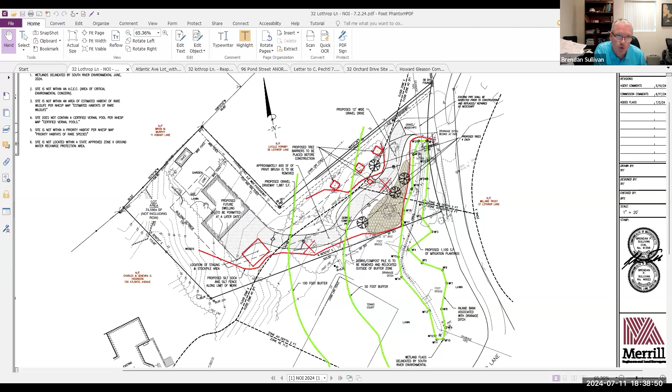The driveway has been relocated to pull it away from the property line a little bit and away from these larger trees, the 26-inch and 14-inch trees that are closer to the property line. So we're going around those trees now. We've added a future dwelling to be permitted at a later date. We were asked to show that to show what the purpose is of the gravel driveway. Let's see, what else was there? I added a note for the drainage pipe to be inspected prior to construction and replaced as necessary in this area under the existing gravel drive wood chip area at the beginning where it comes off of Lothrop Lane.

We came up with an alternative access for the lot off of Atlantic Ave. This access would include the removal of about 5 to 7 trees 12-inch or over. It also goes over some ledge outcrops and some cut and fill areas. So we feel that the better access point for the locus is off of Lothrop Lane. That would also require an easement over the existing lot to get out to that rear buildable portion of what's now 32 Lothrop Lane. I think that's about it at this point. Take your questions and comments. Commissioners?

Can you go over again why you think the easement across the other property, like what was that again? There's ledge there or? Yes, there's a number of ledge outcrops in this area here. There's also, it's all wooded, so it'll be clear cutting. Like I said, it'd be at least 5 to 7 trees of 12 inches or over. I don't know how many more smaller trees there would be.

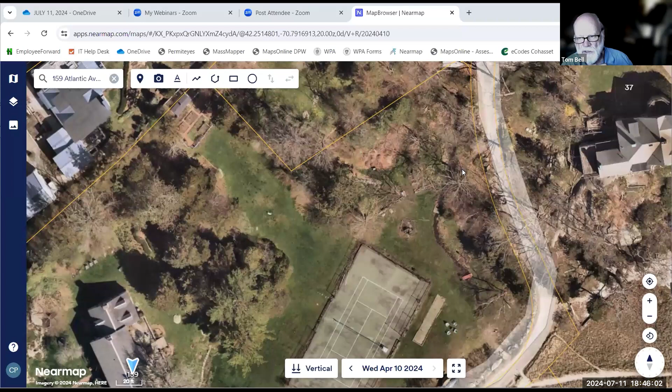Is that tennis court straddling the 2 lots now? No, the tennis court is entirely on the lot for 159. So if you were to mitigate the disturbance in the buffer zones, where could you do it? On our lot? Yeah.

Well, the area that I proposed between the gravel driveway and the ditch, we could do some additional on the other side of the driveway. We might be able to extend the mitigation along the bottom of the driveway. Brendan, if you wanted to pull up your plan again to show the mitigation areas. Sure. You do have a mitigation plan, right? Yes. Okay, let's have a look at that.

Well, it's the same plan, this area in brown here that we're proposing. Right now it's 1,100 square feet, going from the wetland flag line almost to the edge of the gravel driveway. We could certainly extend that up to the north in this area, and also maybe extend it down into this area here. I'd like to try and keep it on the same lot as 32 Lothrop. We could do some mitigation possibly amongst these trees over here.

Like I said, it's this overgrown privet hedge that's there, which is non-native. I don't know if you're going to call it invasive, but if you want to extend the mitigation to like 2,000 square feet or something like that, we could certainly do that. What's the area of the driveway that's in the 50 and the 100-foot buffer? Let's see.

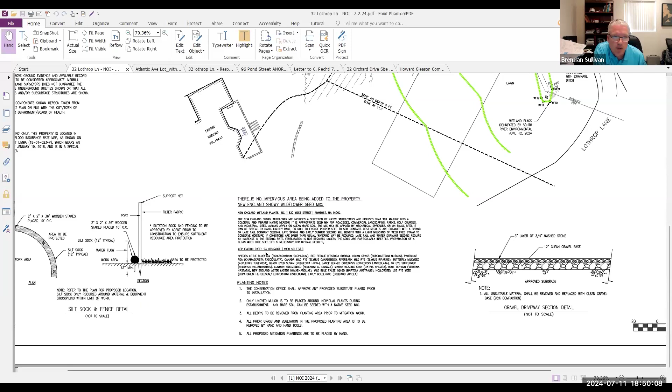Okay, so your current mitigation plan is, did you say 1,100 square feet, Brendan? Yes, we have 1,100 square feet in this area here. Okay. So, I guess I would like to see, well, before I even say that, what is this mitigation gonna consist of? What's your plan here? You have a planting plan? We're just showing the typical wildflower seed mix. Nothing in particular. And we are showing 4 proposed trees. I don't have a species for those yet, but I'm sure we could come up with that. It would probably be something we could take off your preferred tree list, if you wish.

It sounds a little bit vague to me. Frequently when we see a mitigation or restoration, it's a little more detailed than you've got here. The effort to put it on the lot is appreciated, but I agree with the sentiment that if we're giving up whatever square footage it is in the 50, we'd like to try to match that, and not just a generalized seed mix that could be mowed over at any time. Some more robust planning would definitely make that an easier pill to swallow, in my opinion.

And thinking about our mission, which I think is to conserve wetland, it's a struggle. We're not a tree conservancy or a ledge conservancy. From a mission standpoint, I'm struggling with why not just go over a non-buffer area, if there is an alternative route. I appreciate the considerations for ledge and trees, but it seems like a trade-off for existing wetland. Why would we make that trade-off? Well, we're talking about the buffer, not the resource itself exactly here. But that's a good point. You can avoid all of this by executing your alternative.

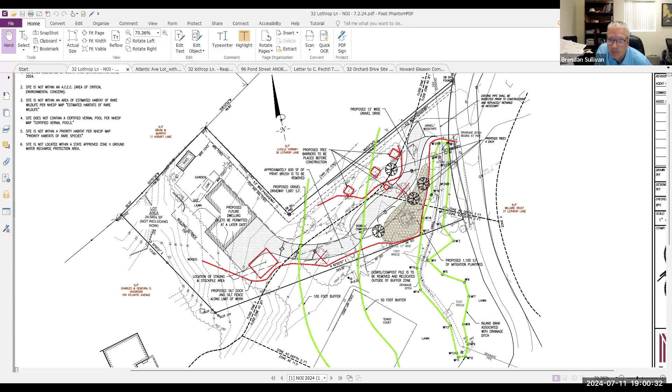Like I said, we can certainly put another planting plan together and propose, I think it sounds like your recommendation is a 2-to-1 from disturbance in the 0 to 50 and a 1-to-1 in the 50 to 100, as well as the trees that we're proposing. Yeah, let's have a look at what you guys can come up with. Again, we're not looking for any kind of curated design. We're looking for random, as natural as possible. Yep. Literally try to restore what the woods were like there.

Mr. Chair, we do have some comments from the audience. Do you want to wrap up what we are looking for here and then address the comments? And I will note, I'm sorry, it's been over 15 minutes, but I figured we'd talk it out a little bit.

Yeah. So just to make sure that you're clear with what we're requesting. We would like to see a formalized plan. We'd like to see a plant list. We want to know where things are going. It would be helpful if you left a lot of this stuff that is irrelevant off of your drawing next time, just really to be clear about what this is going to look like.

And don't stop thinking about the alternative. Come back to us and tell us how much actual excavation, how much cut and fill would be required for your alternative, and how many trees and what types of trees you're going to remove. So right now, you have a relatively detailed plan here. Your alternative is somewhat simpler. I think just a bit more information for that alternative would help us. Okay, we can certainly put that together.

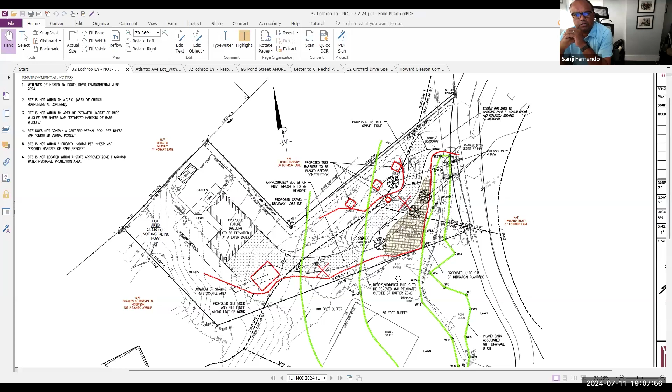Do we need to hear from the abutters? Yes, you do. Yeah, I was gonna say before, can I just go through the comments? I think it might be easier to just promote Ms. Hornby to speak, since she just said we'd like to comment on 159 Atlantic Ave Higginson driveway application. Thank you. Sure. Hi, Lucy. You're muted. Hi, can you hear me now? Yes. Hi, thanks very much for taking our comment.

I'm representing 36 Lothrop Lane. First of all, I'd like to say that we do appreciate both the Higginsons and your commission taking our concerns into advisement. Just as a memory tweak, our biggest concern is that the 36 Lothrop Lane property, which is quite low, drains through that pipe. We're quite concerned that as the new driveway goes in, we heard what Mr. Sullivan said two meetings ago, that the new owners might not necessarily stick with the plan that he has drawn up. So we'd very much like the commission to include in the permit that the continued functioning of that pipe be a requirement of the driveway being put there.

So whether that means assessing it now, maintaining it in the future, the Higginsons have done that over the years, but they'll no longer be in charge of it. So we'd very much like that to be reflected not only in the plan, but also in your permitting process. Second thing, just now you were mentioning closing up that ditch. From our experience, the water flow is extremely variable coming out of the property. It depends very much on whether there's a storm or not.

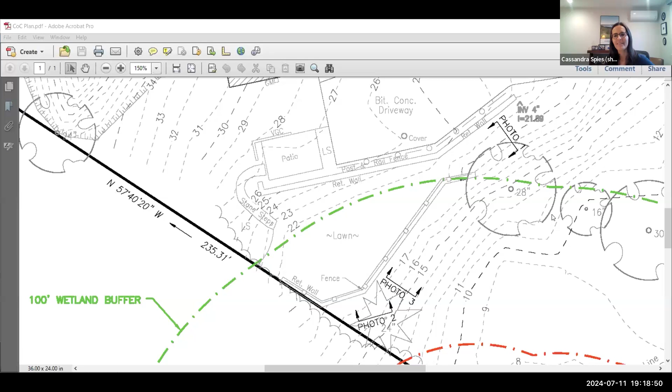Sorry, this is the retaining wall here. It was supposed to come up a little bit like this, and they just left it here. But like I said, the only conditions relative to this would just be our standard number 40, no herbicides, pesticides, insecticides, fertilizers in the buffer zones. And Cassandra, I don't know if you had anything else to add, but that's pretty much it. Thank you so much, Charlotte. So, commissioners, do you have any questions about this?

Doesn't seem so. In that case, I move that we issue a certificate of compliance for, where'd my script go? NOI 2217, 22 Atlantic Avenue. Do I have a second? Did we want condition 40 with it too? The no herbicides, et cetera one? Yes, of course. Okay. Isn't that standard? Isn't that part of our, okay, we just have to call out which conditions we want. Sure. And it's a reminder to the applicant as well that there are conditions, that being one of them.

Thank you. Okay, so do I have a second? Second. Okay, Kathy Berrigan, aye. Sanjay Fernando, aye. Chris McIntyre, aye. Tom Bell, it's aye. That motion passes 4-0-0. Right. Thank you, Cassandra. I'll work on getting that to you next week. Great. Thank you very much.

Appreciate it. Thank you. Charlotte, no, you haven't heard from Valerio? I don't, I hope he's okay, but I haven't heard from him since Wednesday. Yeah. Huh.

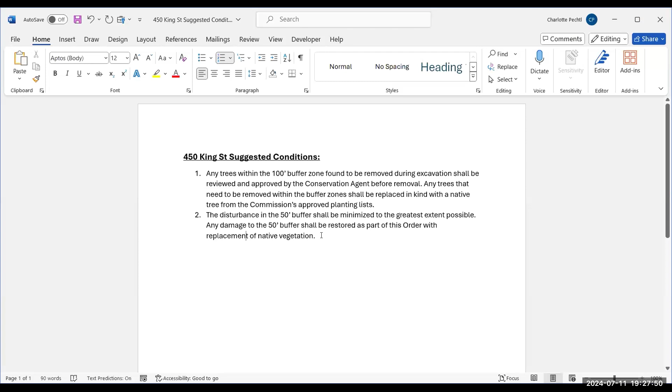So in reality, there really shouldn't be much disturbance at all from just running the trench line, putting the pipe in, and then filling that dirt back in, letting it go back to grass. Yeah, okay. It's all lawn area there too, so it's not like we're removing anything crazy. Oh, okay. And you can just take that out, Charlotte.

Okay, do I have a second? Sure. Sorry, you want to issue an order of conditions with this condition, is that correct? Yes, that's correct. Kathy, I think you seconded. Yes, Berrigan seconds. So the next move is to vote. Kathy Berrigan, aye. Sanjay Fernando, aye. Chris McIntyre, aye. Tom Bell, aye. Motion passes 4-0.

Thank you. Oh, and then you need a variance too. Yes, right. So I move to issue a variance for work within the 50-foot wetland buffer. You need a second. Second, Berrigan. Okay, we're gonna vote. Kathy Berrigan, aye. Sanjay Fernando, aye. Chris McIntyre, aye. Tom Bell, aye. That motion passes 4-0.

Okay. Thank you, Colin. Have a good night. Thanks. So the public hearing for NOI 24-21 is now closed. Okay, next. So 96 Pond Street looks like next.

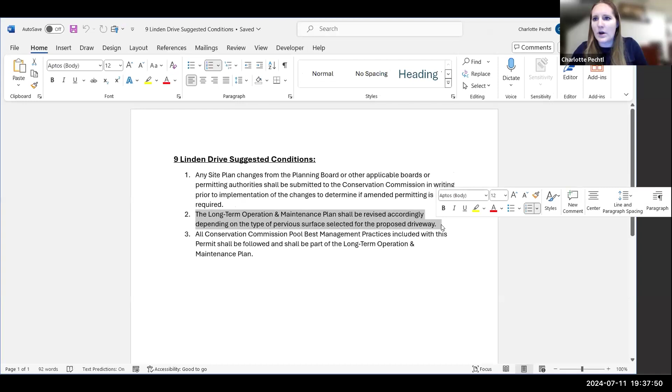And then, since I don't think we're 100% sure on the type of pervious surface for the driveway, the long-term O&M plan shall be revised accordingly depending on the type of pervious surface selected for the proposed driveway. And that the Conservation Commission pool best management practices included with the permit shall be followed and shall be a part of the long-term O&M plan as well. We do have a handout for that, which I'll include in the permit. Sorry, Sanjay, I don't know if you want to reread your motion, but if that sounds good to everybody, or if you want me to modify this, just let me know.

I have a question about the pool filtration. What type of filter are you going to use here? I don't believe it's been determined yet. I know you have a number of standard pool conditions that it would have to comply with, but I don't think we're that far along in the design. Just as long as it's not a sand filter that has to be back flushed regularly. It's probably fine, because of course we don't allow water from the pools to be drained onto the street, and there's certainly no room on this property to drain it properly. Sorry, what was the technical term for that? A sand filter? Yeah.

Okay. Does that sound amenable and appropriate to the applicant as well and to the commission? I think it should be. We've had a couple other projects which were not sand filters, so it sounds like what you're asking for is standard. I'm not an expert in pool filter design, but I think it should be fine. Okay. They would just require a lot more maintenance than more recent filtration systems, but I just want to be sure we don't have an issue of backwashing a filter every 2 or 3 weeks.

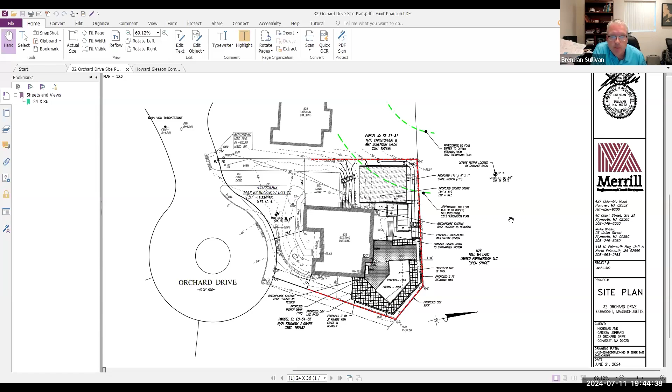It looks like you're going to do some changes to the grade. Yes. I'm going to zoom in on that sports court. So we have the sports court at about elevation 59.5. So here's currently 58, here's 59, and then it kind of grades up to the driveway. So it's a gentle slope coming off the back of the driveway to the back lawn. So we're going to tighten that up to probably about a 3-to-1 slope to be able to fit the sports court, the level area in here.

Like I said, the stone trenching is on the 3 sides of the lower end of the sports court. We get a perforated pipe in there, solid pipe connected to the infiltration system. Okay. So the fill is going to be minimal where the sports court is. It looks like most of the fill then would be between the sports court and the driveway. Right. There's actually, that'll be a cut up there. There will be a slight fill on the back side of it. All right.

And the new plan is going to have, I believe we're also getting rid of the small retaining wall too. We're just going to slope that off. And we're going to add some plantings in there as well. They have a planting plan. I'm going to add some for that as well. Okay, and so you want this to be continued, is that right? Yes. Commissioners, any preliminary comments before we move this along?

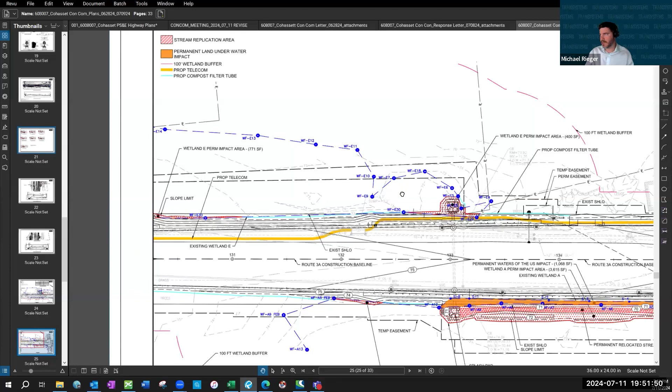So what ended up happening is we had updated the plans to show new impact numbers. So the new numbers for the Cohasset side ended up being 5,453 square feet of impacts. And then we're proposing replication at 2 locations, converting an upland area to replication, and also an area right here. So we came back and have some specs and some plans that show what type of trees and plantings are going to be in the replication areas. That's pretty much the change from last time.

Charlotte, did you say you received some letters about this? So yes, as of today and then earlier in July, there've been a lot of updates from the ENF review and 401. We did get the ENF certificate from the state. There's a lot of comments, recommendations about that, but they did get the certificate. And then 401 is still ongoing.

There was a letter that we received today, I don't know, Mike, if you want to help with summarizing, but basically they had some differences in design, I think, with the bank portion of the relocated intermittent stream. They also had some other changes and recommendations. It kind of depends on how the commission would like to proceed tonight, but I do have a set of recommended conditions that should hopefully be able to incorporate that. And then obviously, if there's any changes to the plan, it would need to come back to us depending on those other reviews. But the ENF review is completed, 401 still pending.

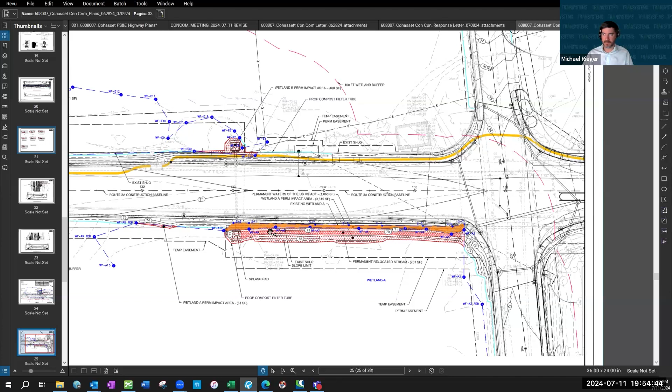So the lingering comments are from MassDEP based on the water quality certificate. They've reviewed a similar set of plans, but slightly different. They're not concerned with the riverfront area as much. But yeah, we have a meeting with MassDEP to go over some of their comments, but I don't anticipate any changes to these plans based on their comments. Well, it sounds like the process is incomplete.

We still need to complete the process with Mass DEP. Yeah, for the water quality stuff. So it's probably premature for us to close this out. Charlotte, did you say you had some comments or conditions that you had?

Yeah, I do have, it's a long list. So if the commission would like me to, I can pull them up. And one of them will at least try to include any potential modifications with further discussions from DEP as part of the 401 water quality certification, because obviously that permit's not our jurisdiction, but any changes they make obviously relate to us, so we would just need to see those changes in writing. But if you'd like me to, I can pull up the conditions.

Well, let me ask this: can we issue this and have a condition that requires that they come back if there are substantial changes based on DEP? Yeah, those are some of the conditions that I drafted, and that's a part of our template as well, that any site plan changes have to come back to us in writing to determine if an amended permit is needed. So that's how I've worded it. And I can pull it up to read it.

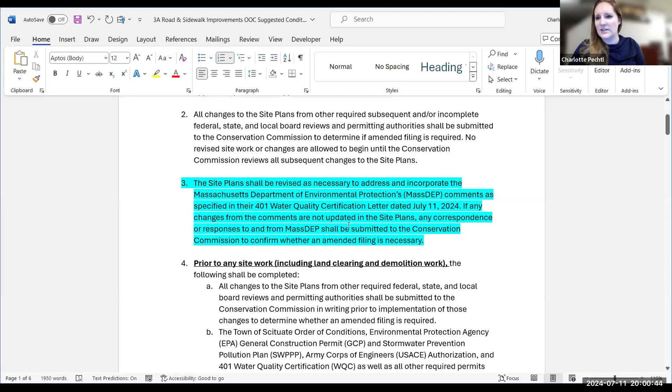Does that condition, I think, sound good? And Mike, do you like that as well? Yeah, basically that states that we need to submit an updated plan set to you if anything changes based on the comments from DEP, right? Okay, yep. That's fine. Yeah, because I know some of their comments may or may not be fully incorporated into the plans, whereas maybe some might. So that's kind of TBD there. And if the commission likes that condition, I can keep reading. Yeah, keep going.

Okay. And then this one's kind of long, but prior to any site work, including land clearing and demo, the following shall be completed. The town of Scituate order of conditions, EPA general construction permit, stormwater pollution prevention plan, Army Corps authorization, 401 water quality, as well as other permits shall be submitted to the commission prior to site construction. That's pretty standard. We do usually ask for copies of all necessary permitting just to ensure we're all on the same page. And then the stormwater pollution prevention plan shall include equipment and offsite vehicle washing stations, stockpiling and staging.

Highlighted in yellow is actually the suggested conditions from the town of Scituate. And if the commission doesn't like these, I can take them out, but I figured maybe we should be on the same page, even though we're in two different towns. But Scituate had said no petroleum products or vehicle washing shall occur on site. They have a lot of comments, by the way, about leakage and spill contingency. So I did try to incorporate those. And then the contractor shall certify construction equipment was recently inspected and maintained for fluid leaks prior to commencement of work.

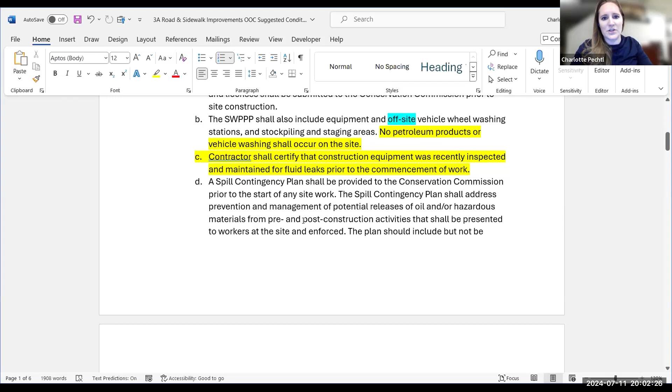And then I added this one, a spill contingency plan shall be provided to the commission prior to the start of work. The plan shall address prevention management. Potential releases of oil and hazardous materials from pre and post construction activities shall be presented to workers at site and enforced. The plan should include, but not be limited to, off-site refueling of machinery, off-site storage of fuels, and potential on-site releases.

Applicable temporary or permanent easements related to private property access and/or alteration shall be obtained and submitted to the commission, including the temporary easement within the wetland replication area in wetland E. Just that the easements I think have mostly been obtained, but we just need copies of those. And then construction schedule, estimated time frame for the specified work under this order shall be submitted in writing to the agent prior to any site work. This was a Scituate condition.

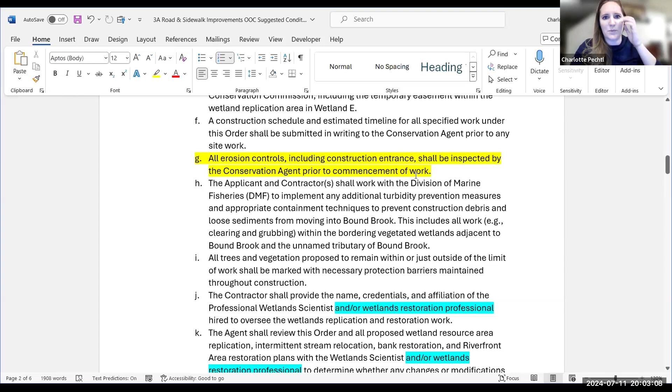All erosion controls, including construction entrance, shall be inspected by the agent prior to commencement of work. That's pretty standard for us. Applicant and contractors shall work with DMF to implement any turbidity prevention measures and appropriate containment techniques to prevent construction debris and loose sediments from moving into Bound Brook. This includes all work, clearing and grubbing within the bordering vegetated wetlands adjacent to Bound Brook and the unnamed tributary to Bound Brook. This was from, I believe, DMF's recommendation letter, so I just put that in here. Just that if there are any additional measures other than what's on the site plan, to coordinate that with DMF. And then all trees and vegetation proposed to remain within or just outside the limit of work shall be marked with necessary tree protection barriers maintained throughout construction.

In regards to the wetland stuff, the contractor shall provide the name, credentials, and affiliation of the professional wetland scientist and/or wetlands restoration professional hired to oversee the wetlands replication and restoration work. The agent shall review the order and the proposed wetland resource area replication, intermittent stream relocation, bank restoration, and riverfront area restoration with the wetland scientist or the wetlands professional to determine whether any changes or modifications to the plans are needed. Mike had previously mentioned in his submission that a wetland scientist or a wetlands professional will be contracted to do this work. So I wanted to have conditions about that in there.

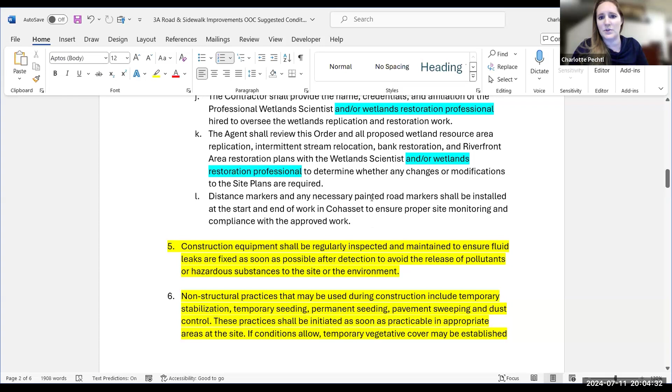Distance markers, any necessary painted road markers shall be installed at the start and end of work in Cohasset to ensure proper site monitoring and compliance with the approved work. I've seen that before for other projects that happen on 3A.

It's pretty standard to, you know, spray paint that stuff on the road or mark it. A lot of these in yellow are from Scituate, so we can take them or leave them. Construction equipment regularly inspected and maintained to ensure fluid leaks are fixed ASAP after detection to avoid the release of pollutants or hazardous substances to the site or the environment.

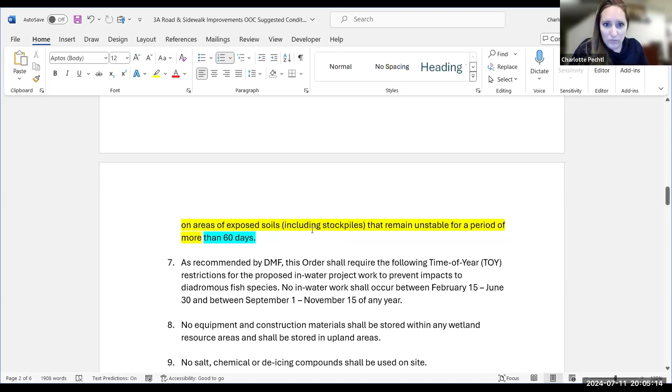Non-structural practices that may be used during construction include temporary stabilization, temporary seeding, permanent seeding, pavement sweeping, dust control. These practices shall be initiated as soon as possible in appropriate areas at the site. If conditions allow, temporary vegetative cover may be established on areas of exposed soils, including stockpiles that remain unstable for a period of more than 60 days. I don't know if you guys agree with that. That's why I highlighted it in blue.

And then as I previously mentioned, as recommended by DMF, the order shall require the following time of year restrictions for the proposed in-water project work to prevent impacts to diadromous fish species. No in-water work shall occur between February 15th and June 30th and between September 1st and November 15th of any year. So that was DMF's recommendation in their letter as well.

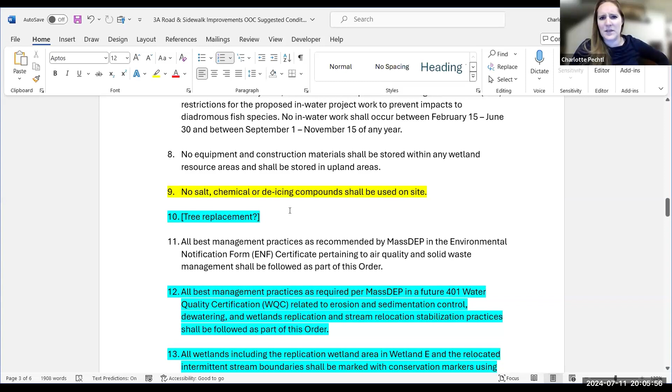No equipment or construction materials shall be stored within the wetland resource areas and shall be stored in upland areas. This one was actually from Scituate. Sorry, no chemical, salt, chemical or de-icing compounds shall be used on the site. I don't know if that's feasible, Mike, but we can maybe talk about that. I left a placeholder for tree replacement, although there is a wetland replication plan for wetland E to plant native trees. So we can discuss that.

All best management practices as recommended by MassDEP in the environmental notification form pertaining to air quality and solid waste shall be followed as part of this order. They usually have pretty standard conditions that are kind of straightforward about similar stuff mentioned above.

And then all best management practices required from MassDEP in a future 401 water quality certification related to erosion and sedimentation control, dewatering, and wetlands replication and stream relocation stabilization practices shall be followed as part of this order, just in case the water quality certification has any additional erosion control or stabilization practices. You know, sometimes they put those as conditions.

All wetlands, including the wetland replication area in E and relocated intermittent stream boundaries, shall be marked with conservation markers using the materials as instructed by the agent and wetland scientist to ensure long-term protection of the resource areas. I don't know if that's feasible or if the commission wants that. That's why I've just highlighted it for now, and I can go back to these. I'll just finish reading all of them.

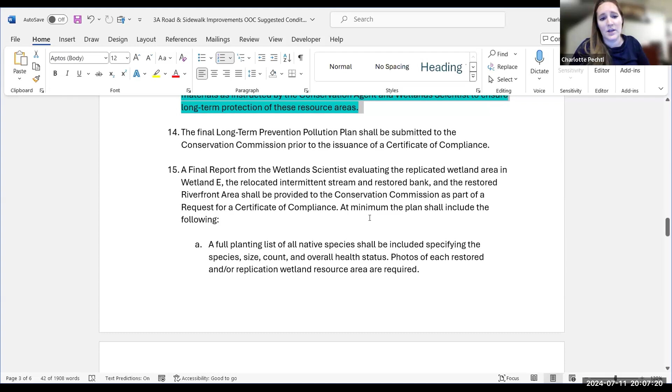Final long-term pollution prevention plan shall be submitted to the Conservation Commission prior to the issuance of a certificate of compliance. That's as part of the stormwater standards. Final report from the wetland scientist evaluating the replicated wetland area in wetland E, the relocated intermittent stream and restored bank, and the restored riverfront area shall be provided to the commission as part of the request for a COC. At minimum, the plan shall include the following.

Full planting list of all native species shall be included, specifying the species, size, count, overall health status. Photos of each restored and/or replication area are required. All native plants, including the seed mix substitutions made by the wetland scientist, shall be included. Post-construction hydrology assessment of the wetland replication area and relocated intermittent stream shall be performed by the wetland scientist and any other appropriate professionals to ensure these areas are still hydrologically connected to wetlands A, B, E, and F in Cohasset.

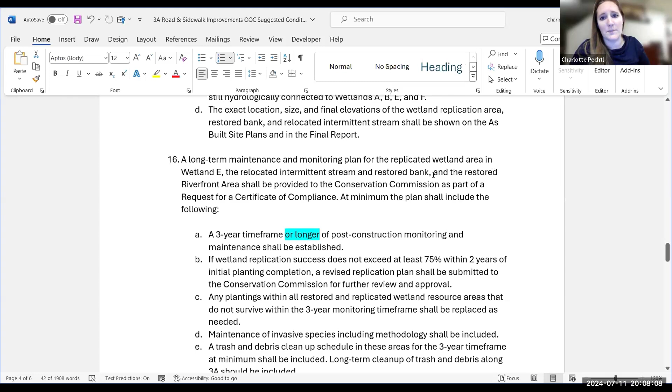The exact location, size, and final elevations of the wetland replication area, restored bank, relocated intermittent stream shall be shown on the as-built plans and in the final report. And then getting to the end here, long-term maintenance and monitoring plan for the replicated wetland area in wetland E, relocated intermittent stream, restored bank, and restored riverfront shall be provided to the commission as part of a request for a COC. At minimum, the plan shall include the following.

TBD, if you guys want to discuss this, 3 years is pretty standard. A 3-year time frame or longer of post-construction monitoring and maintenance shall be established for those areas. If wetland replication success does not reach at least 75% within 2 years of the initial planting completion, a revised replication plan shall be submitted to the commission for further review and approval. The 75% within 2 years is pretty standard. It's in the DEP wetland replication guidelines.

Any plantings within the restored or replicated areas that do not survive within the 3-year period shall be replaced. So this kind of sort of contradicts the other one. That's why I figured maybe we could discuss these. Sorry, I forgot to highlight them.

Maintenance of invasive species, including methodology, shall be included. Trash debris cleanup schedule in these areas for at least the 3-year time frame shall be included. Long-term cleanup of trash and debris along 3A should be included. I understand if that's not possible.

And then the monitoring completion reports of the initial restoration planting event shall be received by December 15th. Subsequent monitoring year events shall occur no later than October 15th, and yearly monitoring reports shall be submitted to the agent no later than December 15th of each year. That's pretty standard for us, Mike, and we can talk about that.

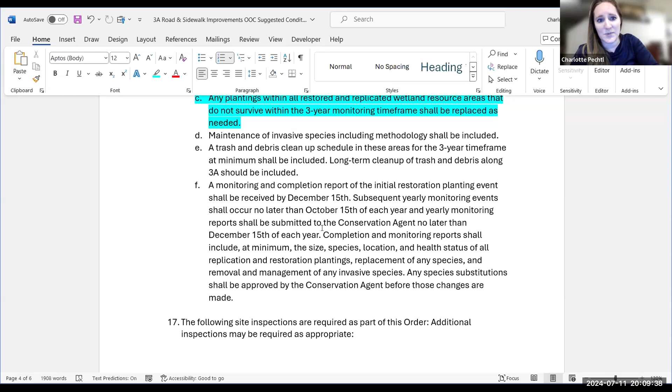Completion and monitoring reports shall include at minimum size, species, location, health status of replication, restoration plantings, replacement of any species, removal and management of invasive species, and any species substitution shall be provided to the agent prior to making those changes. And then last but not least, these are the inspections. A lot of these are pretty standard. So the following inspections are required as part of the order. Additional inspections may be required as appropriate.

So we have the pre-construction visit to look at erosion control, stake limit of work, tree protection barriers with the contractor and wetland scientist as needed. I'm not sure if they're needed at this part. That's why I just said as needed. Pre and post stream relocation to look at erosion controls, the intermittent stream location with the contractor and the wetland scientist prior to removing the existing stream and after the stream has been relocated and stabilized.

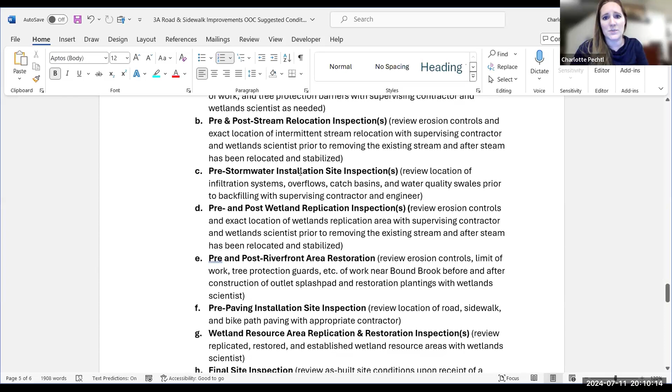And then pre-stormwater installation inspections, just review of any stormwater management prior to backfilling with the supervising contractor and engineer. Pre and post wetland replication inspection. So I assume we're going to need more than one of those, just reviewing, again, erosion controls, location of the replication area with the contractor and the wetland scientist prior to removing the existing, you guys get what I mean, but basically prior to and after. Sorry. And then pre and post riverfront restoration.

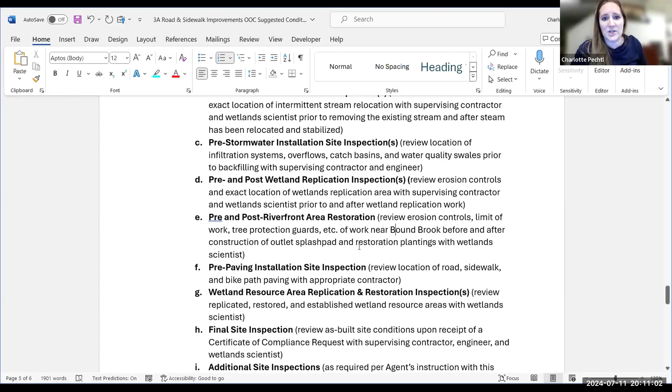So I'm probably going to be out here a lot, as you guys can tell, just to make sure that we're getting that oversight, and I can coordinate with Scituate as well. So review erosion controls, limit of work, tree, et cetera, near Bound Brook before and after construction of outlet splash pad and restoration plantings with wetland scientist. And then just before everything's paved, just making sure that we're clear there with the location of the road, sidewalks, bike paths with whoever the contractor is for that. And then I think I may have done this twice, sorry.

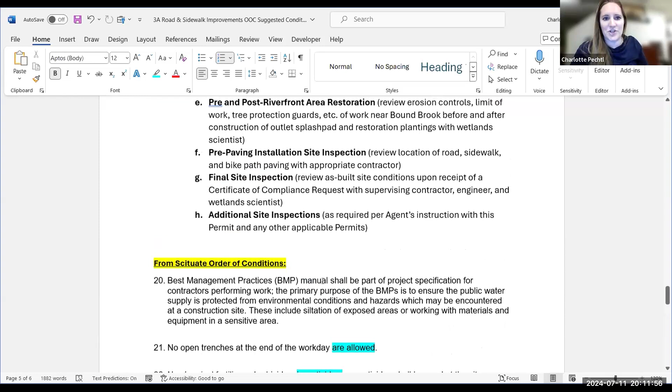And then final inspection to review the as-built conditions upon receipt of a certificate of compliance request with the contractor, engineer, and wetland scientist. And then just a comment about additional inspections may be needed. And then I'm sorry, last but not least, these are the rest of Scituate's conditions. I can save this for a little bit because I just read a lot and I'm sure you guys want to process it, but the rest of these conditions were copied from Scituate's order of conditions, which is in the process of being drafted. So I can come back to those later. A lot of them relate to construction activities and maintenance of vehicles and construction equipment and all that good stuff.

So sorry, that was a lot, but I guess it sounded like we were okay with this one. First off, everybody, commissioners and Mike. Yes. Okay. Yeah, that sounds fine. Okay. And then all of this stuff, including what was highlighted in yellow from Scituate, does that sound reasonable, Mike, to work with whoever I need to work with to get all the stuff before construction? I know it's a lot, but it would definitely take care of a lot of the pending things that we're waiting on.

Is that something you think you'd want to do, coordinate with Scituate during this, or do you want to let them do their conditions and take those out of yours? It's up to, I'm good either way. It's up to the commission as well. These conditions would definitely be repetitive to what Scituate says, but obviously the work in Scituate is not the work in Cohasset, so. Right, yeah, okay, I see. Yeah, I would keep them then, that's fine. Yeah, okay, it makes sense that we're writing a parallel set of conditions. Yeah, and I'll share the order with Scituate as well, so that even though our conditions may not make it into theirs, they'll at least have a copy of what's going on.

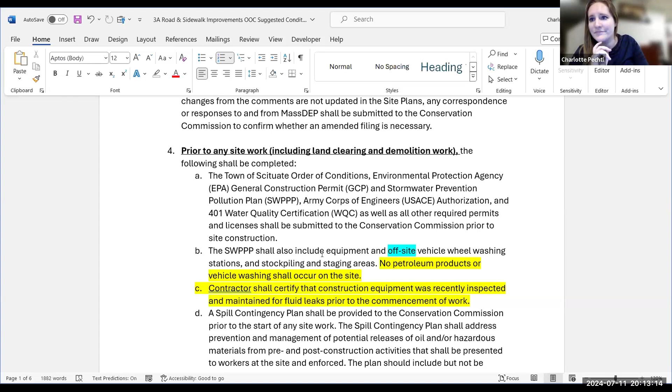But yeah, I guess do all these pre-construction things make sense to you guys? Do you guys think all this is good? I don't know if we can require it to be an actual professional wetland scientist, so that's why I just wrote and/or wetlands restoration professional. And I think, Mike, based on your experience, does that sound appropriate?

Yeah, there's an item in the contract, the MassDOT standard contract, where, let me just get the terminology. Sure. Okay. It's referred to as a wetland specialist. Okay. Yeah, I think this is pretty general then, because it might be a PWS, but a wetlands restoration professional or specialist. We can switch it out for specialist if everyone wants that instead. Sure. And I'll fix that throughout the language too, just to make it consistent.

Okay. And then these are two from Scituate. Are you guys good with these about construction equipment, temporary erosion stuff? I think a lot of that's also mentioned in the site plan. Yes, okay. And then I don't know if you guys agree with the 60-day thing. Apparently they've done that for other projects. Yeah, like stabilize stuff, including stockpiles, if it's unstable for a period of more than 60 days.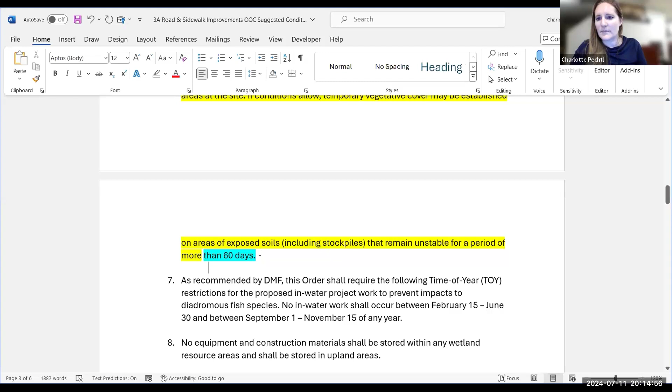Well, it just seems arbitrary almost. Yeah, I'm not sure why they have 60. Usually you're supposed to cover it in anticipation of storm events if it's unused for more than, I think, 5 days. Yeah. 60 days seems like a long time. I mean, we can just take this entire sentence out. We could just say vegetative cover may be established as needed, or if it remains unstable for more than a period of like 5 to 10 days.

Yeah, I'd be inclined to shorten that from 60 days. We're seeing downpours becoming more common in North America. And if we had one of these serious downpours for 24 hours, those piles, who knows where they'd go, right? They're gonna end up in the Gulf River. Does 3 sound more appropriate, or 5 to 7? Yeah, I'd say 5. Okay. I've seen 5, I've seen 7, I've seen 10, and as needed.

I don't think temporary vegetative cover would ever get a chance to be established enough to stabilize it in a rainstorm. Maybe that's why they said 60 days for temporary vegetative cover, because that's not going to be an emergency tactic that's used. Yeah, depending on the material, in some cases you'd want to put tarps over it. We could just say if conditions allow, temporary vegetative cover may be established. Yeah, just keep it general. Because that was the standard condition they had.

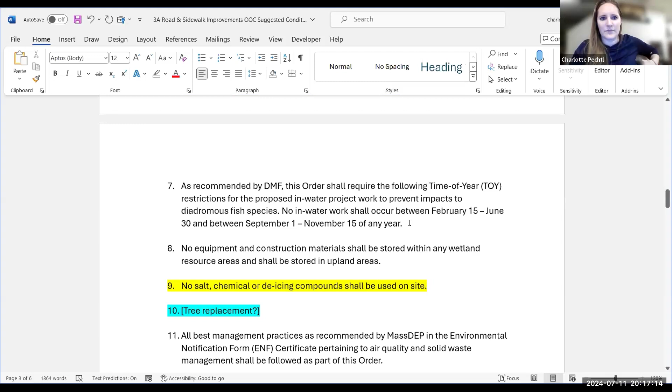And then, Mike, do you have any issues with this time of year restriction, at least for the work near Bound Brook? No, that's per DMF, so we're gonna have that in our special provisions. Okay, great. So that's consistent with that. And then this is pretty standard for us, no material stored in the wetland resource area, so obviously no excavators just sitting in the middle of a wetland, it's pretty common sense.

And then this was a Scituate condition, I don't know if that's feasible. I mean, 3A probably needs these things, but I don't know. I'll leave it up to you guys, but that was a condition that Scituate has. Yeah, we might need to tweak that one, because the road does get salt, I believe, during snowstorms. Yeah, and it's already getting salt. Conceivably, it's not gonna get more salt because of this. Right. You guys want to take it out? Yeah, I just don't know if that's enforceable or feasible with MassDOT putting stuff down in the snow. It's a matter of public safety, I think.

Okay, and then this is more of a topic for the commission. There are trees that are getting removed, not just in the wetland areas, so I don't know if we want to see any replacement or if you guys were okay with the provided wetlands replication plan in wetland E. I know you did the best you could to avoid tree removal, but there still are some trees here and there.

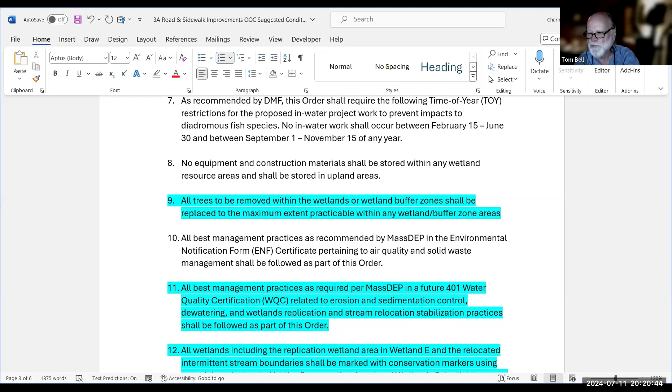One of my concerns would be a loss of canopy and then colonization by Phragmites in the open areas. So the sooner that you can reestablish canopy there, the less likely it is that we'll end up with bigger stands of Phragmites. I think that's one of the weaknesses when they took out the dam at Bound Brook, that they really didn't plant enough trees there and they aren't big enough. So any time that could be taken over by Phragmites, and all that effort to keep the stream clear for fish passage would go away in 3 or 4 seasons.

Yeah, it's definitely a really good point, Tom. Does the maximum extent practicable within the wetland or buffer zone areas sound appropriate? Yeah, we may not be able to get all the trees back in, but we can try to see if there's anywhere we can fit them. We might just have to go to the site, see which trees are coming out, take a count, and figure out where we might be able to put any of them.

Yeah, and certainly any of the big ones that are shading the stream or the new stream are really valuable. Again, we're fighting this losing battle with Phragmites. And every tree that we remove in one of our wetlands, of course, opens it up to Phragmites invasion.

Okay. So I'll just leave it open to wetland resource areas or buffer zones, because perhaps there's a little more room within the riverfront, maybe closer to Bound Brook. So if we can't get the trees along the wetland areas along 3A, if it's too tight, maybe we could squeeze them in larger areas. Mike, does that sound appropriate? Yeah, I think maximum extent practicable seems appropriate. We can certainly look for areas. I'm looking at the plans now. I'd have to focus in on where trees could even be placed.

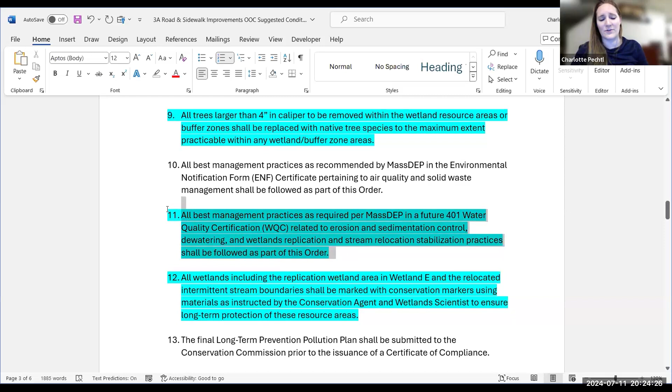And then these 2 conditions, do these sound appropriate? Obviously if there's anything contradicting in the 401, what DEP might want to see for erosion, sedimentation control, dewatering, any stabilization practices. I mean, they may not have anything specific. They may have a general condition, or I can just take it out if it's too complicated. I mean, we've already said changes are going to come back to us anyway.

Yeah. Okay. And then do we want conservation markers? I just highlighted this because I wasn't sure, and I don't even know if this is feasible. We do this for private residential stuff. I just don't know if that's possible for MassDOT. But I think, Mike, you had said that you were open to marking the wetland replication areas and the relocated stream at the very least. Yes. Yeah, that's what we plan on doing, going out and marking out where the new replication area will be. Okay. And that could be part of the pre-site visit that you do to kind of sign off on the area.

Okay. Commissioners, are you okay with that? That the new wetland replication area in Wetland E and the relocated intermittent stream boundaries shall be marked with conservation markers using materials as instructed by the agent and the wetlands scientist to ensure long-term protection of the resource areas, and it's going to be marked also for monitoring purposes. Yeah. Okay.

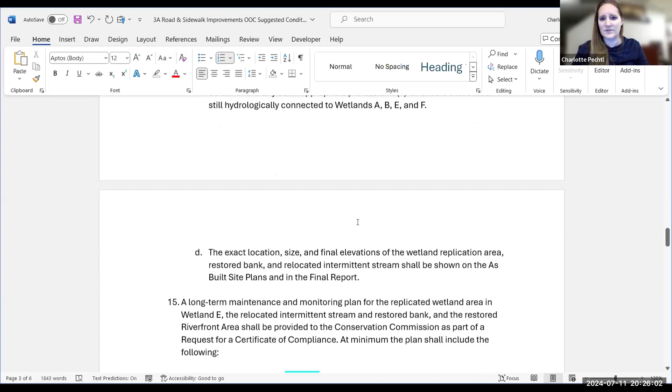Keep going. And then in terms of the final report, this is pretty standard from what we'd like to see when we're dealing with restoration and replication. And then I guess I can kick it back to you, Mike. Does that sound feasible? We'd want to see the plantings, any substitutions. We want to make sure everything's hydrologically connected because that's why Wetland E was chosen as a replication area. And then putting the exact location, size, elevations of the replication area and relocated intermittent stream on the as-built in the final report.

Yeah, I'm just looking at the special provisions we have now for the wetland monitoring reports and the language in there, so we were gonna submit the reports based on the commission's recommendation, like 3 to 4 reports. Okay. So whatever you wanna see, we can give you a report whenever you want, that's fine. Okay. So for a final report, commissioners, are you okay with all the plantings, photos, native species substitutions, seed mix substitutions, post-construction hydrology assessment to make sure all the wetlands are still connected? Yeah. And then size, location, final elevations, all that good stuff on the as-built in the final report. Yeah. Anything else you guys would like to see?

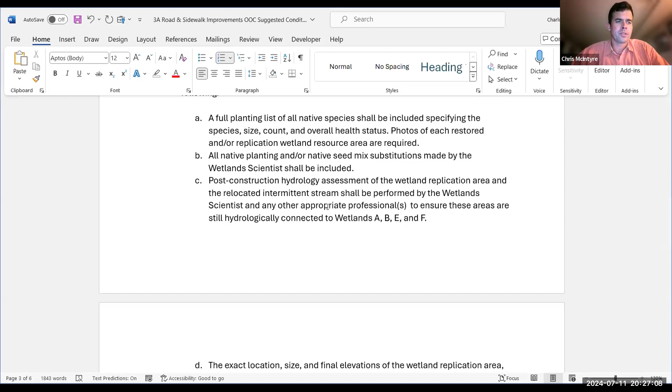Yeah, conceivably they're not gonna ever need a COC, right? So what other incentive could we have, probably none, I guess, just to follow through on this stuff? Well, we are going to need a COC. Well, I guess they could just, yeah, no. I see your point, Chris. So, I mean, we can require the final report after a maintenance period, I guess, after the 3-year time frame. So within 3 years of the initial planting, the final report's due. Yeah, that makes sense. Okay.

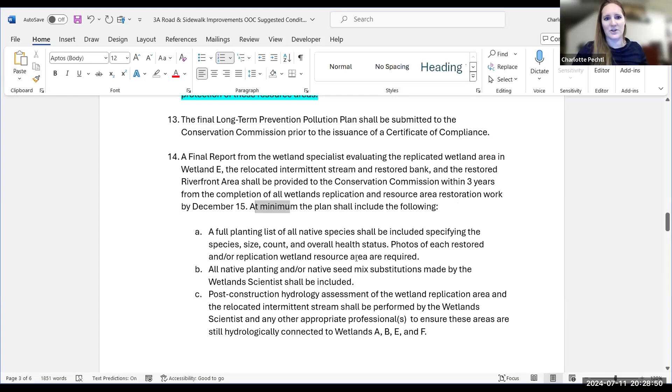Okay, is that it? But within completion of, I'm trying to word this quickly, sorry. Is that okay? By December 15th, within 3 years from the completion of all wetlands replication and resource area restoration work. And then at minimum it shall include all this. You guys good with that? Yeah. It's due in 3 years from when they finish the work.

Okay, and then long-term maintenance plan. We can also say within 3 years, have that with the final report. You get a maintenance plan and a final report instead of a COC. Yeah. Okay. Instead of a COC? All right.

Okay, and at minimum, the plan shall include at least 3 years or longer of post-construction monitoring and maintenance. These two are a little contradictory, so it's up to you guys. This is the standard for BVW replication for DEP. I don't know if we can get 100%, but if the commission wants to see any or the majority of plantings replaced, it's up to you guys. Whatever you want. Maybe higher than 75, or if you want, I don't know.

How are they different? Hang on. So 75% success means 75% of all plantings survive within 2 years, whereas any plantings restored in the areas that do not survive 3 years shall be replaced. We've had these conditions for various projects, so I put them both in, and you guys can decide. The 75% in 2 years is standard for BVW replication. But we're requiring 3 years of monitoring. Yeah, that doesn't make a lot of sense.

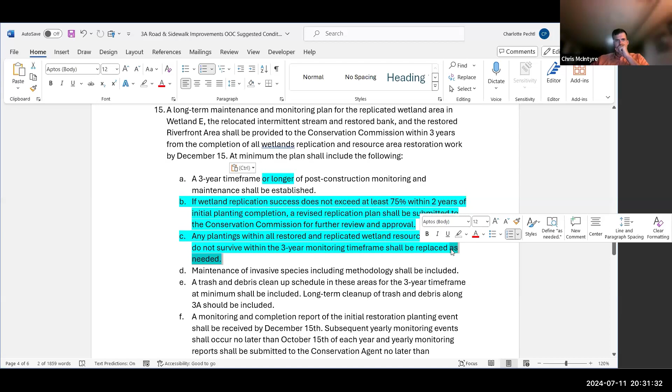Okay. We can say, maybe for this one, shall be replaced. I said replaced as needed. Or we can say it shall be replaced to the greatest extent practicable, I guess. Yeah, that's our workhorse term, isn't it? Yep. It's also used a lot in the regulatory world. Greatest extent practicable. And then just cleaning up the area, monitoring reports.

We want monitoring reports no later than December 15th. Subsequent monitoring events no later than October 15th of each year. Yearly reports shall be submitted no later than. Well, actually, to make it simple, we could just say every report is due annually by December 15th. You guys okay with that? Yeah. Oh, they want the events to occur no later than October and the report to be due no later than December. Yeah, that makes sense. We've done that before for other stuff.

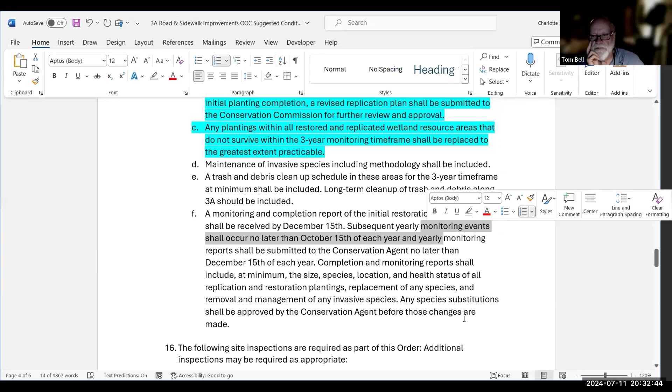But maybe they won't be able to get out by October 15th. So we can take out the yearly monitoring events and just say the monitoring report shall be submitted no later than, and let them do their monitoring when they want to. You guys okay with that, or do you want to keep this? Well, it seems like they could monitor 9 months before that and a lot could happen. That's true. And past October, November, things are starting to go dormant, so it's harder to evaluate.

That's why this is pretty standard, to get monitoring in the summer or the fall before everything starts to go dormant. Yeah, let's leave that. Okay. And this I copied exactly from our Beechwood enforcement order, so if you're good with that, we'll keep it. And then no one wanted any other site inspections, right? Because I've already put a lot in for the stream, stormwater, wetlands replication, riverfront paving, and final. That's pretty good, right?

All right. And last but not least, do we want all of these Scituate conditions in here? No, I think it doesn't make sense to have one plan for one town and another next door. For 22, similar to the road salts, MassDOT has different permissions to use herbicides for invasive removal. So I don't know if we can enforce this if MassDOT's doing shoulder maintenance, for example. I don't know if we can stop them here.

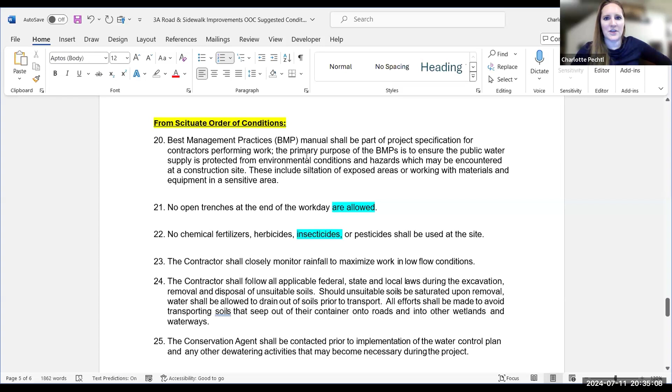Mhm. Let's leave them in there. Yeah, I'm fine with that. Okay, so you guys okay with the rest of these? I haven't fully read them yet, but I think you guys at this point can read them.

This one wanted the agent to be contacted on dewatering. That's fine with me if it's fine with you guys. And then like I said, they had a lot of conditions about checking equipment, making sure it works, no spills, having a spill containment kit. It is a little bit redundant to what I've already drafted, but if we want to just keep it in here for the sake of just being consistent, that's fine with me. Yeah, let's do that. Okay. All right, sorry, that's it.

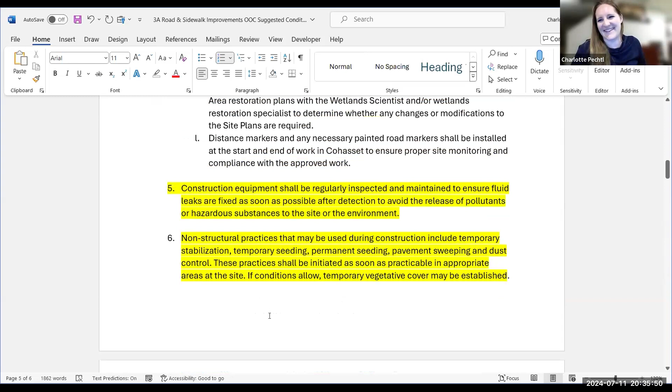I don't want to make a motion now that I've read them. Yes. I move that we issue an order of conditions with the conditions as read into the record. Second. Hang on a second, I was thinking for a second. I want to move to issue an order of conditions for NOI 2412 Route 3A with the conditions that have been read into the record. I'll take your second again.

Second. Okay. Kathy Berrigan, Kathy Berrigan, aye. Sanjay Fernando, oh, Sanjay, you're muted. Oh, sorry, Sanjay Fernando, aye. Chris McIntyre, Chris McIntyre, aye. Tom Bell, aye. And motion passes 4-0-0.

Now we need a variance for work. It's exempt per our local bylaws. Oh, so okay, yep. Right. We don't want to waste our time on that then. Yep. Thank you, Tom. Thank you, Charlotte. Thank you, everyone. Thank you, Mike. So the public hearing for NOI 2412 at Route 3A is now closed.

All right, we'll take a quick break. Thank you. Sorry, that was long. Yeah, I second that. We're not going to vote on it though. Do you guys want 5 minutes? Please. Okay. Yes. Thank you. Okay. So we'll come back at 8:42. Okay, sounds good.

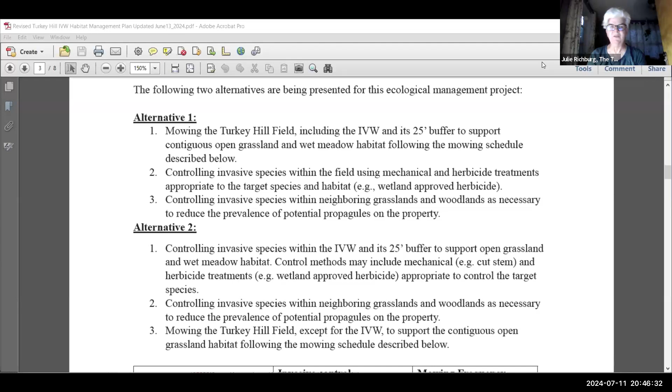So thank you all for sticking in for a late meeting. I know it's not easy to be dealing with this stuff so late. So the main thing that we did to update the management plan is to add two alternatives. We actually have three alternatives. One alternative is the do nothing alternative. But then there are two alternatives. Charlotte, if you want to go to that table, I think that's easiest to show the differences between the two alternatives. They kind of span two. Sure. But we're looking at the invasive control and mowing frequency within the isolated vegetated wetland and within the 25-foot buffer.

So in alternative one, we talk about doing invasive control both within the IVW and the buffer using mechanical methods as well as wetland approved herbicides, and then have a biannual mowing frequency within both of those resource areas. And we talk further about best management practices, avoiding really wet times, looking for those dry times, not mowing within grassland bird breeding season.

And then alternative 2 is looking at within the IVW, we would still do the invasive control using mechanical and wetland approved herbicides, but would not do any mowing. But we would do mowing within the buffer zone, again on a biannual basis, making sure that we're not mowing during really wet times because we do not want to be causing any rutting, and using appropriate equipment. In the field outside of all the resource areas, we would be doing mechanical and herbicide control of invasive species and annual mowing as we're doing now. So those are the 2 alternatives that we've added in.

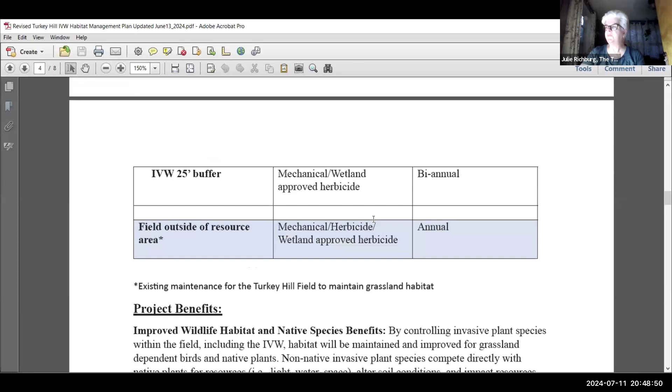Again, looking at maintaining contiguous open grassland and wet meadow habitat by doing invasive control and mowing in alternative 1, not mowing in alternative 2. We do have best management practices, as I was mentioning, that we've added in. I think if you can go down to that, page 4, I believe, where we talk about what herbicides we would be using, how we would be using those herbicides. Again, wetland approved herbicides, wetland approved surfactants as needed.

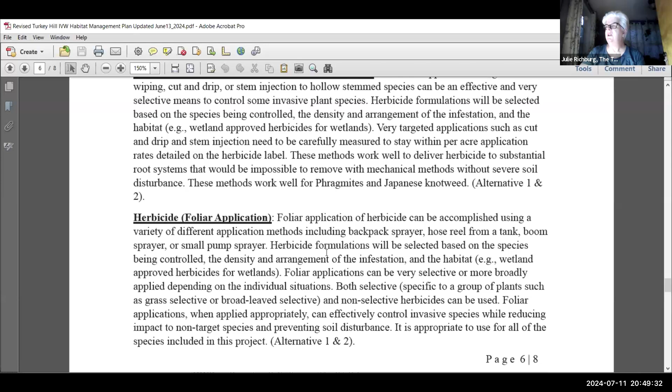Really focusing on how to prevent erosion, how to prevent rutting. And then a lot of invasive control, you have to really time it to the most optimal time for individual species. Not all species can be treated at the same time, depending on when they're flowering, when they're going to be translocating chemicals into the root systems. So that has to be really specific to individual species.

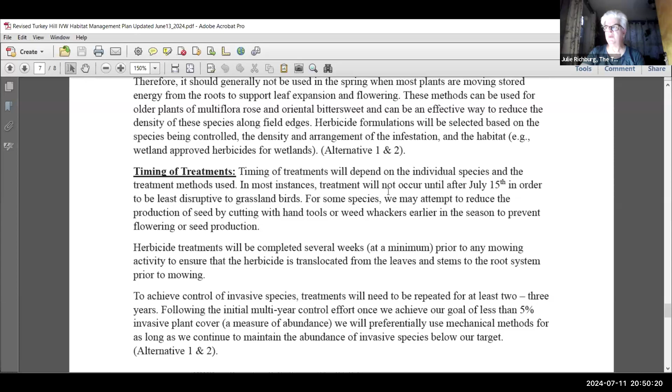And, you know, the overall intent with this project is to localize removal with mowing and mechanical and chemical treatments to protect the native flora and fauna within the wetland and the buffer zone, while preventing damage to native flora and fauna to the extent practical. So sorry, I was jumping around, Julie, but I can go to the mowing BMPs too if the commission wants to look at those. And thank you. Sorry.

Wayne, did I miss anything? That's kind of a really short synopsis of how we had changed the NOI from how it was previously submitted. I think the only thing to add is just around those best management practices for mowing. We did additionally want to say we aren't planning on mowing the whole area. We were going to just do a selective mowing pattern where the operator would only mow areas that had invasive species, had woody species in it, and then we would leave everything else unmowed. So I think that's an important distinction from our first plan, which was just mowing the entire area.

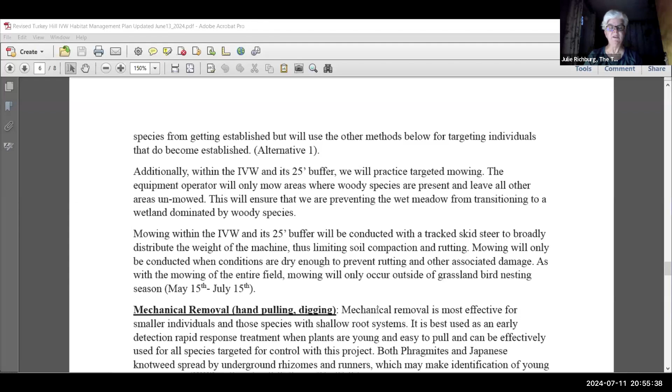I was just trying to follow along, but it still will be a wetland, right? Like it would still be a wetland habitat. Yep. We're not changing that. We're not draining. We're not dredging. If it actually grew up into more trees, that could actually dry it up more because the trees would evapotranspirate potentially more. Yeah, our intent is to keep it as a wetland habitat and one that's not that common around. I think that speaking of that, could you pull up the wetland delineation, Charlotte?

Please. I was curious, since we are bordering Hingham, how well they established that this is an isolated wetland that doesn't extend. I know that slope, there's wetlands along that contour.

Oh, sorry, Chris, do you want the map first or do you want the memo from ECR? Whatever you think makes the most sense. Probably have to pull up both, just one so you guys can visually see it again, and then just a quick refresher. There's two, so the Hingham line is obviously to the north. Another wetlands party had evaluated this area beforehand and flagged both of these wetland areas.

This person had differences in opinion with ECR as to whether or not these were wetlands. So I think the first report was maybe they weren't, but then we had a second opinion. We had ECR, Brad Holmes, go out, and Brad only walked this larger one, because obviously we're dealing with the Cohasset side here. So he walked this one and re-investigated it and determined it to be an isolated vegetated wetland. And I can pull up his memo as well.

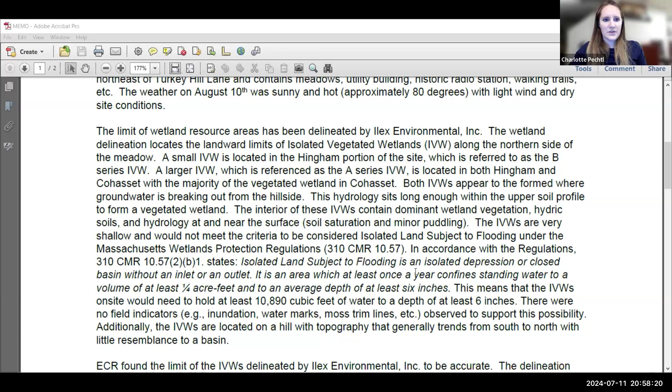And he also determined under the Wetlands Protection Act that it was not an isolated land subject to flooding. Basically doesn't hold enough water and it's a little too small. Well, it's also on a slope. Yeah, right. That's probably the biggest reason it's not. We did find hydric soils. We did see the majority of wetland vegetation, and at the end he said it does not contain any vernal pools, not in an area of environmental concern, not near a USGS mapped stream, does not contain land subject to flooding. So he said per the commission's jurisdiction, it's an isolated wetland with a 25-foot buffer.

Yeah, so there is no connection; there's a BVW down the hill quite a ways. No connection, right? Yeah, and I did get some additional clarification from Brad, as I asked him today. Sorry, I'm just getting to his email. He said, yes, the IVW is separated from the BVW. He would have to dig a little bit more to review, but he remembers the area was a slight pocket of wetland species with soils and some groundwater near the surface to make it an IVW within the field area. Yeah. And that's consistent with what Steve Ivas and I saw when we were out there the first time. Okay.

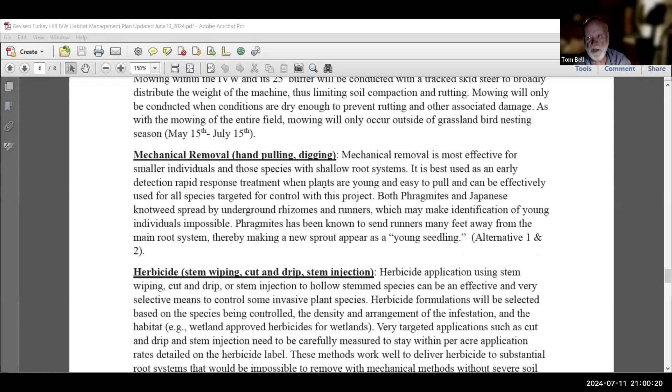So back to the issue of how intrusive the treatment is going to be. And we talked a little bit about mowing. Tell us a little bit more about the herbicide program that you're going to use. What herbicides, and how are you going to do this? Wayne, do you want to describe that? Sure.

For the woody species, it would probably be a foliar application applied with best management practices. We would probably use Garlon 3A, which is a triclopyr product, and a non-ionic surfactant, which are both approved for use in wetlands. For the Phragmites, we would most likely do a cut and drip, where we would come in and drip the herbicide right into the stem of the Phragmites.

And Julie, would we be using glyphosate for that? Is that the recommended one? I believe that's recommended for Phragmites.

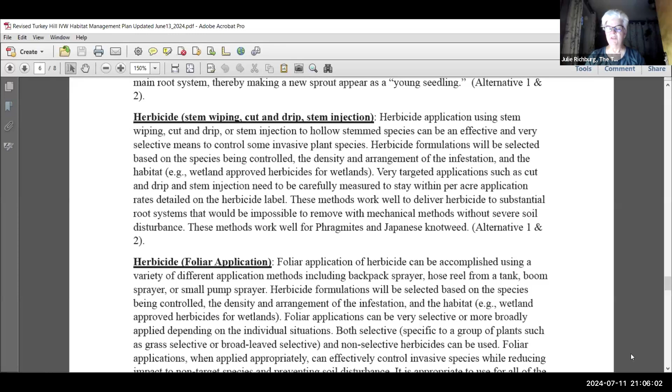Of these options, what are you guys in favor of, or what are you advocating for? I would advocate for alternative 1. That would be our preferred alternative, but we can work with alternative 2 as well. I would not advocate for alternative 3, the do nothing approach, because then you're really going to be sacrificing this area. It's just going to become overgrown with invasive species, which are then going to be throwing seeds into neighboring areas as well.

Mr. Chair, I've been really bad with time tonight, but just wanted to note that we've had about 20 minutes. So I don't know if we want to choose an alternative that our commission overall is most interested in, because I think that would be really good guidance for the trustees. Yeah, I'm leaning towards alternative 2 actually, but I guess the foliar spray is worrisome.

I mean, I use these chemicals myself in my own yard, and I don't spray without having some sort of container. Now, I don't have 4-foot multiflora rose, but even if I did, I wouldn't try to do it by spraying. I'd cut it out and then deal with the shoots as they came up, putting a piece of pipe and the spray in that pipe so that the surrounding vegetation is not exposed at all. It keeps the amount of glyphosate hitting the soil to a minimum. It's controlled. It's not floating away in the air.

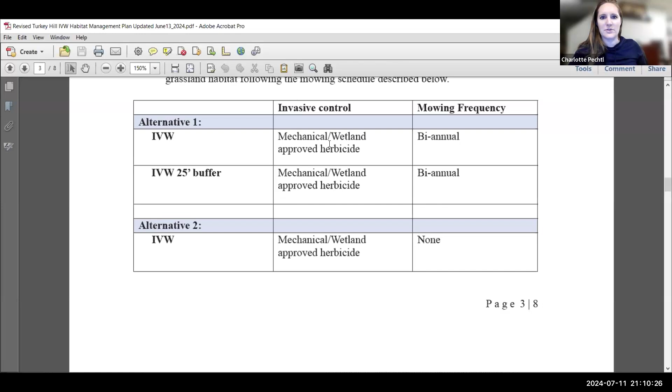So alternative 1 would be mechanical and approved herbicides in the IVW and the buffer, and then biannual mowing with those best management practices. And then alternative 2 would be the same herbicide use within the IVW and the buffer, but there would be no mowing in the IVW, and then more controlled mowing in the 25-foot buffer. Or targeted mowing, for the targeted invasives. Mowing would be under both alternatives. There'd just be no mowing in alternative 2 within the IVW itself.

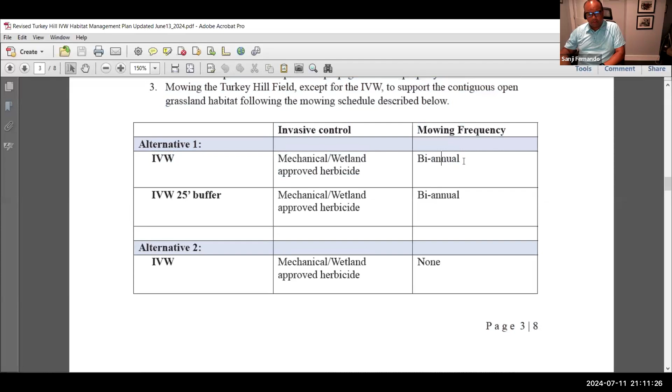Oh, I'm sorry, Julie. Thank you for clarifying. So all of the mowing that's marked as biannual here would be targeted. So you wouldn't be doing the whole thing, it would just be where there's invasive species. Correct. Okay, if I say it back, there's mowing and herbicide in all options. It's just a question of mowing frequency and the area in which it's happening, but all options are targeted mowing. Correct. So when you say biannual, what months would you mow?

Normally in the fall, October, November, something like that. It could even be December; if the conditions are right, mowing when it's frozen is actually way lighter on the land. And biannual means twice a year, doesn't it? Every other year is what we're... Oh, yeah. The 25-foot buffer, if you don't mow there, it just naturally grows, or what happens in that scenario? I'm just trying to understand the difference between those two.

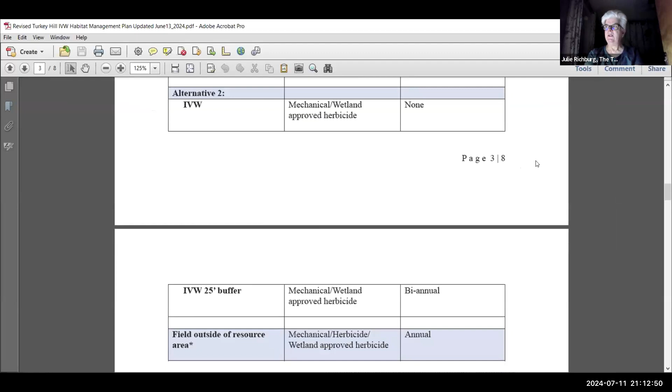So the difference of not mowing within the IVW itself is... Or I'm just trying to understand this table, do I think of IVW row and IVW 25 as all one lumped alternative? Oh, the table spans 2 pages. Sorry, there's IVW buffer in this alternative as well. I don't know if you can read that, but is that better? So in the IVW and the buffer for alternative 2. Oh, so in alternative 2, there's no mowing in the IVW. Correct. And you're advocating for alternative 2? Alternative 1, where we would be able to mow within the IVW.

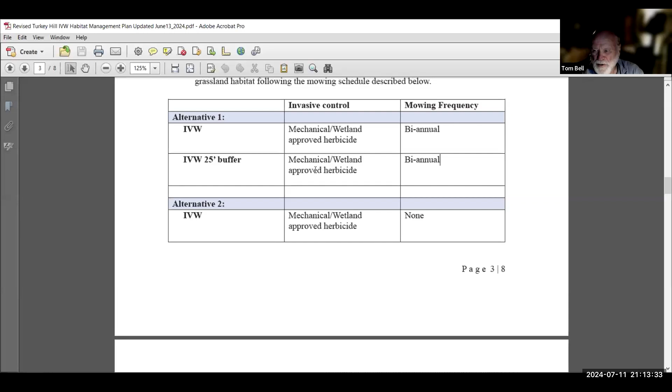All right, I'd like to make a motion. What is it, NOI? Before we do, Chris, do you have anything? You've been remarkably silent about this. I know this is something that's super hard. I'm kind of just listening, regarding the herbicides. It's been something that we've seen come up, and I'm just trying to think of how we could assess the effectiveness and the potential negative impacts of this as a kind of trial, I guess.

But at the same time, when we first reviewed this, I was curious why they didn't try to expand the meadow to the south. I guess it's been there. It's pretty rocky. I see the value in the meadow. Is there a reason why that's not been considered as an alternative, and if so, why is it not a feasible option? I guess it would probably be tree removal, but that's pretty much how they created this swath of land, as we saw from aerial imagery. So you're looking at the south side? Yeah, the opposite side of the meadow, where I think there's trails and stuff.

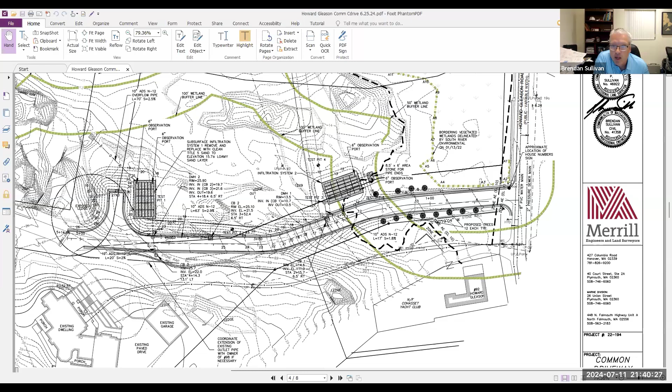So let me pull up the plan here for Howard Gleason. I know it's been a little bit since we had our site walk out there. When we went out there, we had the driveway staked out, and we needed to locate this stone wall that was constructed on the left side of the roadway as you come in.

So that's been added. I moved the bottom of the driveway closest to the street about 3.5 feet to the east. Due north is to the left of the page. So I moved it about 3.5 feet closer to the BVW over here. And I can even that a little more as well.

But I've also added 12 trees. Some on this side and 4 on the left side as they come up, and try to get them in a higher area, so get them out of the overflow that we get from the high tides in this low area, like below 7. So we get 12 trees proposed.

From the 12 trees that we're losing in the 50 to 100, there's no trees we're cutting down in the 0 to 50. And I can show that on the tree plan. I've added tree details to the tree plan, which is this one here.

And Tom, you mentioned trying to save one larger tree, I forget the species of it, at the end of the stone wall. It looks like we'll be able to maintain that tree and try and save it. We pulled the grading over a little bit. We got some other trees planted around it, but it looks like we can save that tree at the end of the stone wall.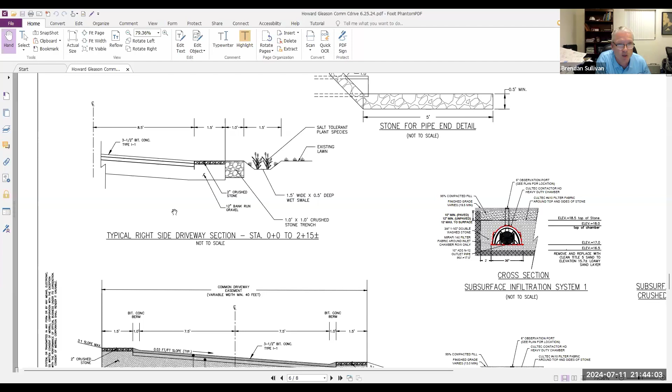So basically the whole roadway will still be super elevated. So all the runoff will be coming down across this stone apron into the stone trench, and then spill over into the wet swale, and then either spill over during high storms, or in low storms will slow down and infiltrate, and near the bottom will just kind of flow out the way it does today and spill over into the BVW.

So this is kind of the area. A2 doesn't show up on there. There's A3. Okay. So the A3 flag is right here. That's kind of the closest point to the roadway. Like I said, that's where we're going to get our 4 foot separation approximately from the edge of the apron to that flag.

The only other comment was, and I know we talked about it before, moving the silt fence that was on the adjacent property of 98. I didn't get a chance to do that on the plans, but we can certainly. The silt sock, we had it staked out up in front of this gentleman's lawn. So we'll probably have it come up and go along the base of this stone wall here, and come up in here to get it off of his lawn. We don't need it up there. This is upslope where the work is being done. So those are the changes I have.

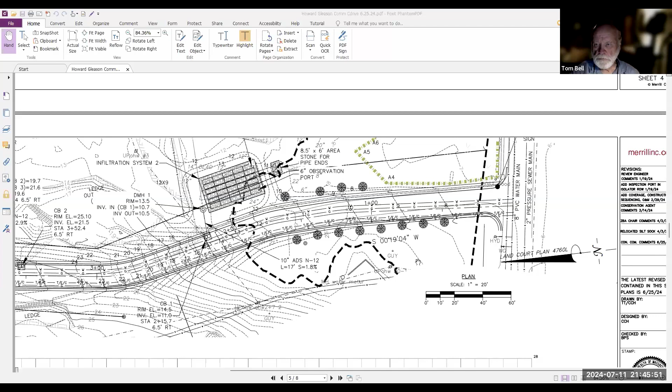Questions or comments? Sure. It looks like you've addressed pretty much everything we asked for. Sorry, Tom, did you have a question for me? No. Nope, okay. I'm just saying that it looks like all the recommendations we've made have been addressed.

I had two questions. Can you remind me again what was the net on the trees? You're taking some down, but you're adding 12 back? Yeah, so let me go to the tree plan. The ones in red are coming down. That is 1, 2, 3, 4, 5, 6, 7, 8, 9, 10, 11, 12 in this area. So those are the 12 trees we're taking down for the roadway and for where the infiltration system is going. So we're proposing 12 trees along the roadway, obviously once the work is done.

And within the 50, these smaller trees, I think that's a 22-inch or a 12-incher there and a 6-incher, but the trees in the orange circles are being maintained. I think we were able to pull the infiltration system away from those and save those 3 trees there. So between the 50 and the 100, we get 12 trees coming down, we're replacing 12. So that's where that number comes from.

And one other question, I think this is great, what happens when water runs off the driveway out to the road? Can you explain that again a little bit? So the whole driveway, as I said, is super elevated, meaning it's not a crown, it's graded from one side of the road to the other. The last catch basin is right up in here, which is just beyond what we call Station 2. Station 00 is at the edge of Howard Gleason Road. So we have about 200 feet of roadway, and I call it a roadway. That's where typical roadway catch basins are spaced, or at least try to be. This is a 16-foot wide, paved common driveway. So that's the last catch basin.

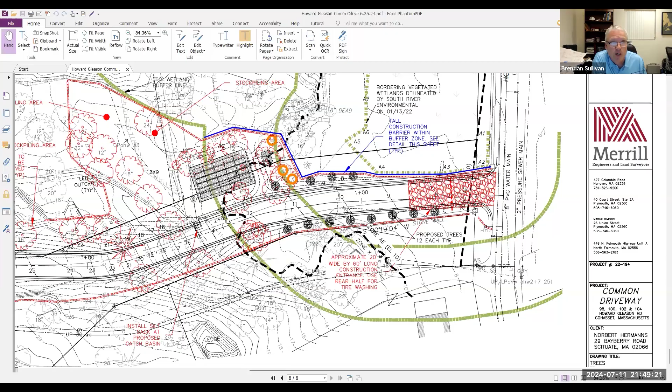And the roadway will be crowned then to make that possible? Well, no, once again, it'll be what we call super elevated, meaning it's just pitched from one side of the driveway to the other. Because if we put a crown in it, the crown is usually in the middle of the road. It's shown on the detail sheet like this here. As you're looking up from Howard Gleason Road, the high side is going to be the left side and the low side is going to be the right side. So all the water is going to be going that way.

If you put a crown in the middle, the left side is going to be trapping water and it'll be just going out to Howard Gleason Road. I mean, this really isn't to scale. It's a 3% cross slope. It's certainly enough to get the water across, but with the naked eye, you can barely see it. Yeah, thank you. That was helpful.

Hi, sorry, is that to me? Some conditions that you proposed here. Yeah, luckily nowhere near as many as the last few hearings.

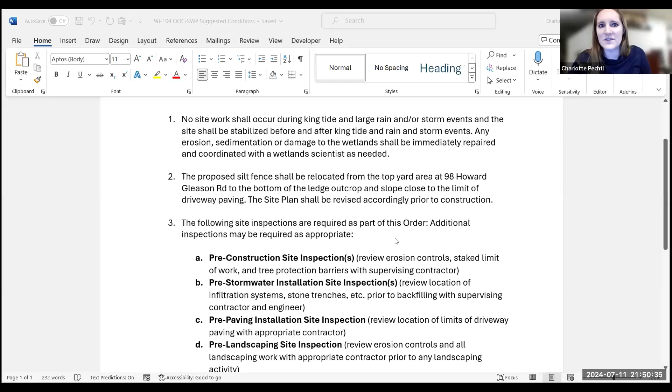Great. So this is really more of a question in terms of feasibility, but also this property, Howard Gleason floods quite often in regular storm events and king tides. So I guess Brendan, I know you're not a driveway contractor, but do you think it would be feasible to put in a condition about either minimizing or not doing work during those large events to prevent any risk of sedimentation, erosion, damage to the wetlands?

Because there's wetlands obviously on one side of the driveway and then there's the marsh across the street. So I'm just worried that once everything starts getting ripped up and relocated, if there's a massive washout event, then all that dirt's going to go right into the salt marsh across the street. So I was trying to think of a way to mitigate this, maybe specific time of year restrictions, but I just figured keep it general and just say don't do any work during these events.

I don't think those people are going to want to go out there and do that. It's just I'm concerned about stabilizing the site. So if it's feasible to put this first condition of not doing site work during king tide or large rainstorm events, and the site has to be stabilized before and after them. And then obviously any damage needs to be immediately repaired and coordinated, even potentially with a wetland scientist, depending on how, if we get like a massive storm, for example, how are we going to fix that area? If that's feasible, I would recommend it.

And then just two other basic conditions that we're going to relocate the silt fence from the top yard area at 98 Howard Gleason Road to the bottom of the ledge outcrop and the slope close to the limit of driveway paving, and then just revise the site plan accordingly before you start construction. And then these are the inspections that I recommend in terms of pre-construction, stormwater installation. These are all very standard, and I just added pre-paving just to make sure the limits of work are clearly defined before everyone starts paving. And then just a pre-landscaping inspection, and then final site inspection. But I guess it's really just asking about the first condition, if that's feasible and if the commission agrees.

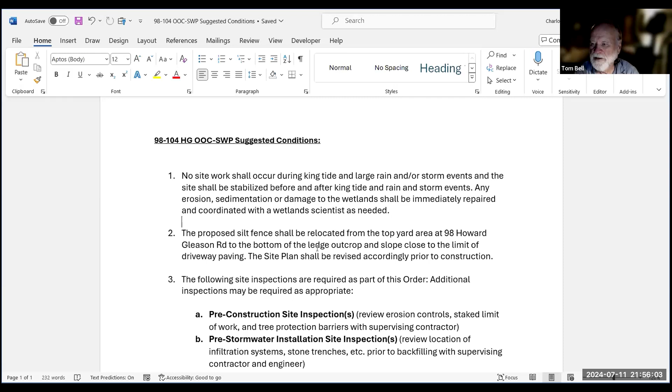But it sounds like construction here is still a long ways off. But as long as you're mindful of this in your scheduling, in other words, consult the tide table before you start building here. Yeah, you can restrict it to summer, before the larger storm events come in the fall, and after the spring. I know we've had a very wet past couple of years, but summer is historically the drier time. If you guys wanted to see this work only done in the height of summer to early fall, that's probably when those contractors are going to be around anyway.

How long will it take to build the driveway? I don't know that one either. Imagine how much ledge we're gonna run into and utilities and such. If we're gonna restrict it to a calendar, I'd rather restrict maybe the first, say, 200 feet of road. Because we have about 600 feet of road we're constructing here, and really the first 200 feet is the section that's gonna be affected by the tide and storm surge. Or we could say within the land subject to coastal storm flowage, and then use that elevation mark as a border. That would be fine. Yeah, that's good.

I think that's elevation 12. Oh, it's 10? Oh, sorry. I think it's 10. So do you want to keep this, or do you want to just say no work shall occur within land subject to coastal storm flowage past, I don't know, it's up to you guys. Do you want to do calendar stuff, or do you want to just do storm stuff? Well, if you're using the land subject to coastal storm flowage, you probably don't even have to worry about the tide because you're above it.

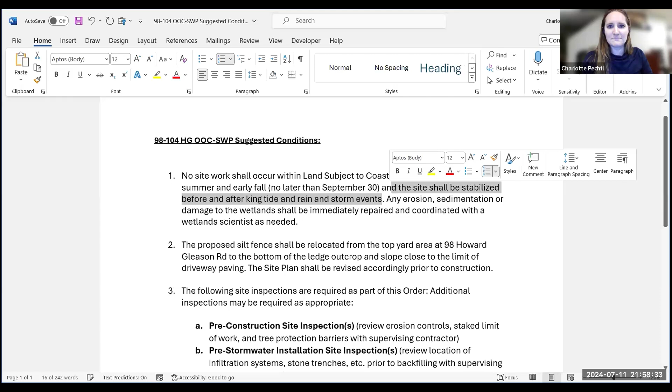Yeah. September? Or October? No, September. We've had some good ones in October. Okay. All right. Last chance, commissioners. So summer, so is that June 20th? Yeah. It's our beginning date. I'm good with mid-June. I think that's fair. Can we say June 1st? Or when are your spring tides, Tom? April, May? I have to look on the tide table. I feel like it is April and May. I could be wrong. Okay, June 15th might give us a little bit of a border. June 15th is good. Just after Flag Day.

There we go. Yeah, if you're only having to worry about the first 200 feet, that's even less of an issue, or whatever's covered by the storm flowage. Okay. You guys good with that, commissioners? Just restricting the work within land subject to coastal storm flowage between June 15th and September 30th. Just no work in that time frame in that area. Yeah. Okay.

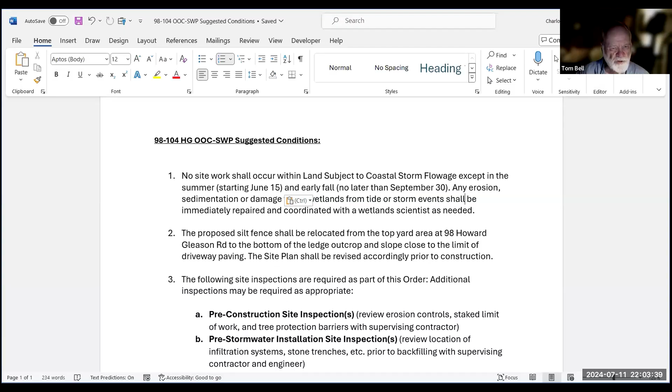And the public hearing for NOI 2404, stormwater permit 2407, 98, 100, 102, 104. Oh, Tom, did you already vote to issue a stormwater permit and an order of conditions? Did you do that in the same motion? So I move to issue a stormwater permit for SWP 2407 at 98 through 104 Howard Gleason Road. Second. Roll call vote. Kathy Berrigan, aye. Sanjay Fernando, aye. Chris McIntyre, Tom Bell, that motion passes 4-0-0.

So the public hearing for NOI 2404, stormwater permit 2407, 98, 100, 102, 104 Howard Gleason Road is now closed.

Great. Thank you very much. Thanks, Brennan. Have a good night. You too. I'm gonna go before I fall asleep.

Next is a resumption of the public hearing for NOI 2410, 150 Howard Gleason Road, continued from June 6th, 2024.

Okay. Hi, Mark. And hey, John, how's it going? Can you hear me, guys? Okay? Yep. Excellent. Good. Well, hopefully this won't take too long. I know you've had a long night and I appreciate your time.

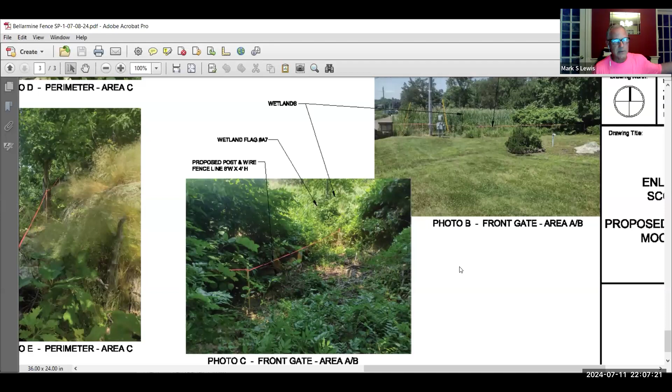Of course, we know we can't do this anytime soon. Everything's pretty well overgrown, so we'd probably look to do this early next spring, when all the vegetation's gone. So we think that worked out pretty well in the front. So let's take a look at the next area. So this was a little more difficult. So I call this area C, but

Hey, yes. Before we leave, I thought from the site visit that it would tie into almost like a rock formation. Is that still the case? Yeah, Sanjay, we couldn't get that close to it, to be honest with you. So it kind of runs just beyond, and the rock happens probably like 25 feet beyond that. So we're not really anywhere near that with the ornamental fencing, because the property line runs a bit. We get closer to that as we come down in the area C area.

So again, we're not going to be that close to it on that side, and we want to try to minimize how much of the ornamental fence we put out front anyway. So that would be easier to do. So the condition along what I call the C area runs where Charlotte's pointing to, and I've tried to actually quantify how many we need, and it's looking like we would need upwards of 135 8-foot sections around the entire perimeter if we can get them in.

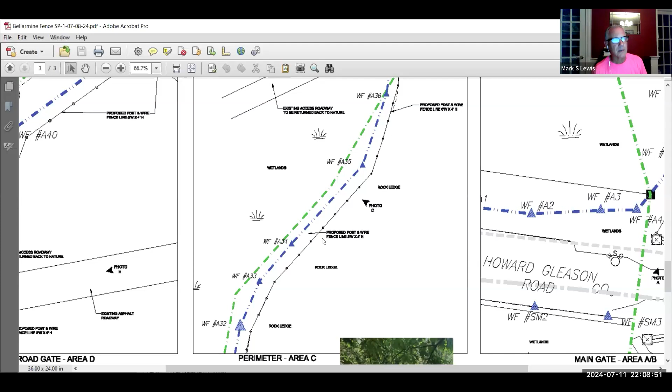In some cases, it might be difficult or impossible, but I was able to get a stake, and I went to each flag and I pulled off the flag line about 5 to 7 feet, depending on where I could get something into the ground. And I was able to get a stake into the ground, which I found to be almost a miracle. If you look closely at photo D there, you can see clearly wetland flag A34. And I pulled the line 5 to 7 feet inward, and I was able to get a stake into the ground. You can see it in the foreground there.

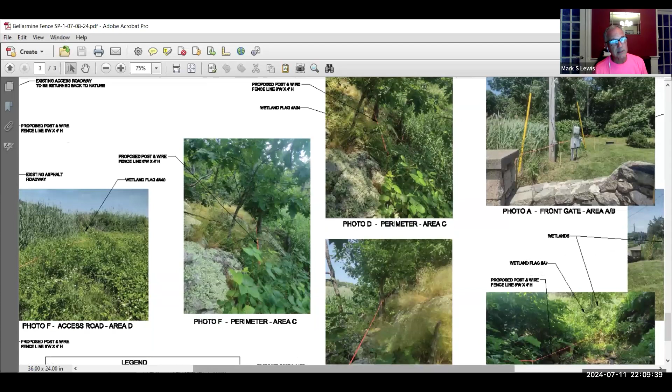And I tried to do them every 8 feet. We know it's not going to be that easy all the way along this, but we think it's possible. And that pretty much runs all the way from this point out to the front of the property. This condition is very similar. And as we get down towards the south, you'll see it opens up a little bit easier.

So the last area, which I'm calling access road area D, I think can be a win-win for us, because we don't want to put a gate there. We don't need to. Our property line is not even in where that road is. And you can see right now that the vegetation is already pretty much overgrown. So we'd love that, just to go back to nature. There's no need to have that roadway there.

If you look beyond, that's where the new house will be. The Herman's house would be up on the bluff there. So there's really no need for access there. I think he has access coming beyond the wetland on the other side. So there's really no need for that. I think if it just could overgrow, it would be great.

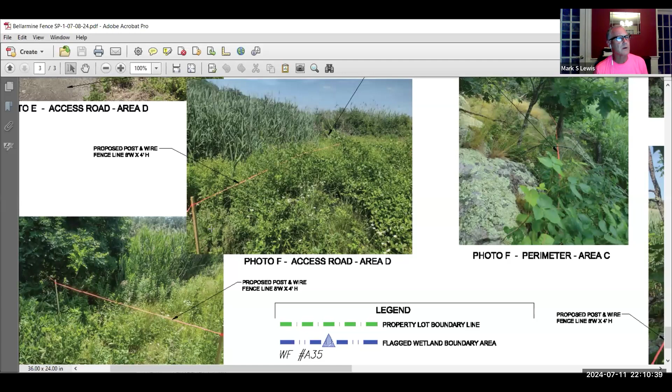And then if you're looking at photo F here, that's again the line coming across the roadway and going out towards the Ocean Way and the marsh. And if you look at the plan up top, Charlotte, we're going to wrap that around. We initially weren't going to go that far with it. And again, we're not exactly sure how far we can get down with it, because we start coming into beach plum and things like that. But that's something we're willing to work with you on if we can get it to a certain point.

No people really access this area. It's very difficult to get at. But again, our trustees really would like to just delineate our property the best way we can to keep people off it. And that's generally it. So if there's any questions or concerns, I'm certainly happy to entertain those.

Do you have any comments? So for this one, I think it's simple enough where I think a pre-construction visit, just to walk the area and verify where everything's going, I think is sufficient. I mean, the work will definitely be done by hand. It has to be, you know. You don't necessarily, you know, need to keep anything in any of these areas.

So, at least for me, I'm personally okay with just walking, you know, where all the fence is gonna go. And I think that should pretty much do it. This isn't a project that needs multiple site visits unless it's needed. And we technically already have a pre-construction visit in our template conditions. So I know I've been writing them very frequently, but at least in this case, I think you could probably just defer to our standard template unless we want to incorporate any specific things you'd like me to inspect with, possibly with Mark and John, or just Mark or just John.

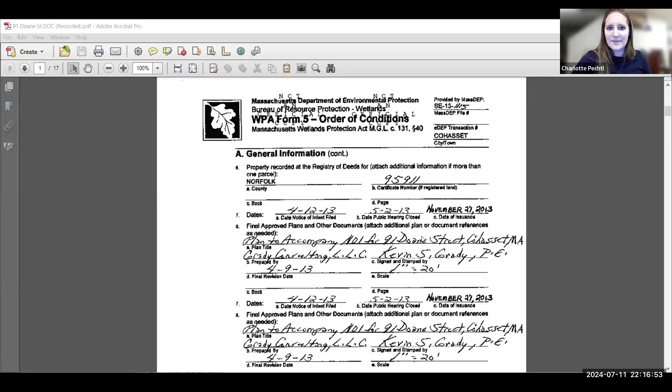They've had septic reports, Title V, it's passed inspection for the sale. So at least for me, I have no concerns. But I will just pull up the order real quick, just to see if we want to issue any ongoing conditions. The numbering is sometimes different, so I'll just quickly see where the herbicide condition is. So with this one, it was.

All right, it was condition 35. So yeah, no pesticides, herbicides, fertilizers. Yep. So that would be the one condition I'd recommend as ongoing. The rest of these were all template conditions at the time, and I don't think they pertain to the work anymore.

So, I move to issue a certificate of compliance for NOI 1310 at 91 Doane Street with condition 35. Second. Okay, Kathy Berrigan, aye. Sanjay Fernando, aye. Chris McIntyre, aye. Bell, aye. The motion passes 4-0-0.

And certificate of compliance for NOI 1531, for 79 to 123 Atlantic Avenue. Yep, so this one was the original order of conditions for Treats Pond. It was filed back in 2015. Basically, the reason why they never did it back then is because they were trying to get all of the easements and permissions from all the property owners, and I think one or two weren't signing off. The work just wasn't done.